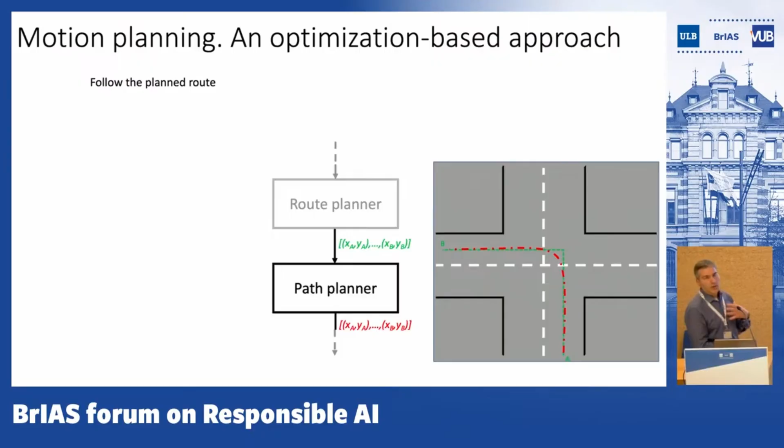So that's why in an autonomous driving stack, you have a module called the Path Planner. That does exactly the job we do every day while driving our vehicle. Okay, clearly we as a driver plan our path subject to a number of rules or constraints.

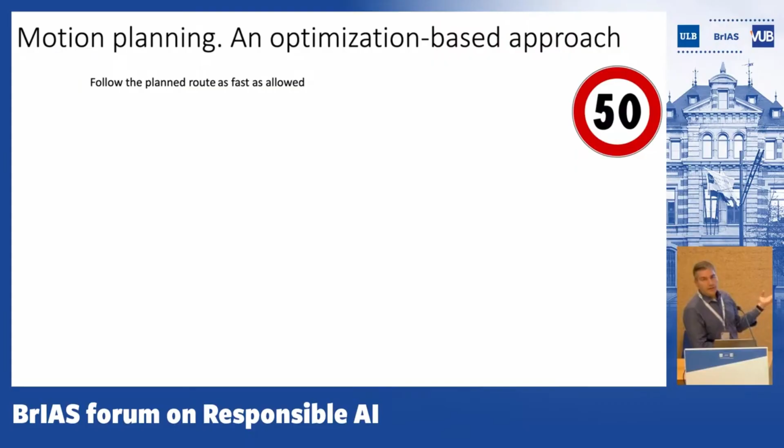So clearly we plan a path and we follow that path subject to vehicle speed, right? So speed limitation, like the one that you see over here. Clearly you don't plan anything which your car cannot do. So as a driver, we also plan our path subject to what the limitations of the vehicle are.

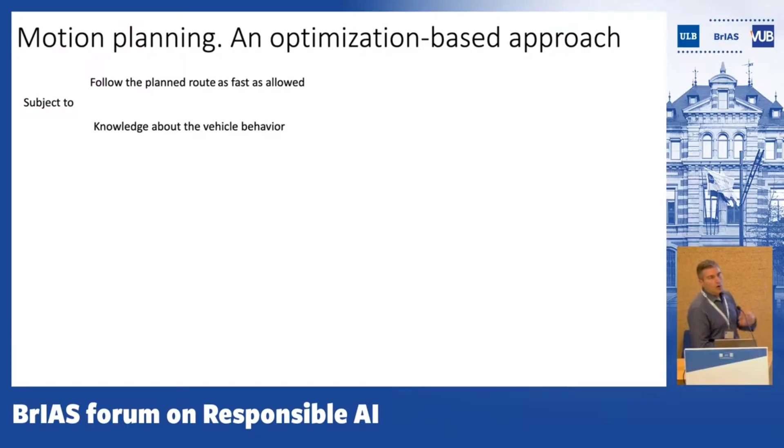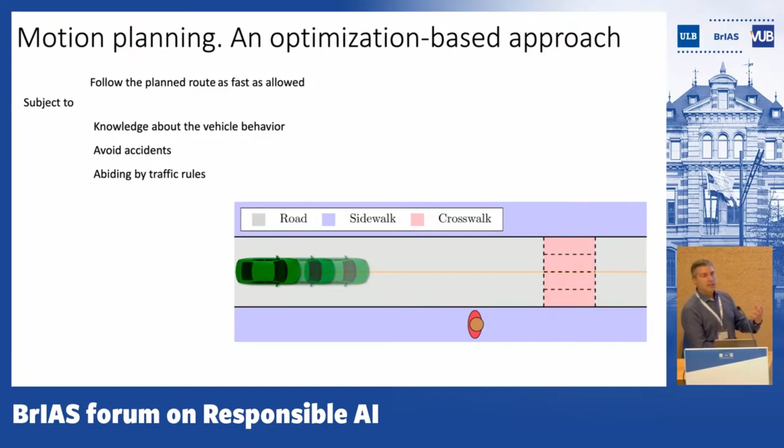Clearly, you want to avoid accidents. So if, while planning the path of your vehicle, you see a pedestrian or a static obstacle, well, you will make sure that you avoid any collision with any obstacles. Furthermore, you have limitations coming from the vehicle, right? So here we have a steering actuator.

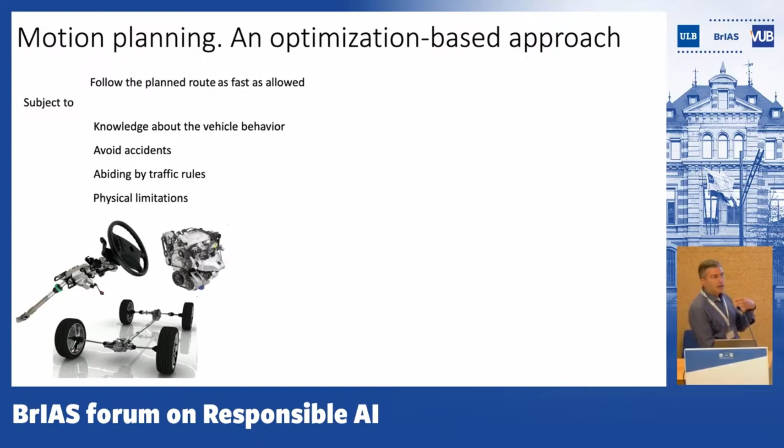Well, a steering actuator is basically essentially an electric motor, and you can't steer as fast as you want. So while planning your path, you should also account for limitations imposed by the physics of your vehicle. Same holds true for engine, braking, or whatever your actuators could be in the vehicles.

So to solve this problem, to solve the path planning problem as I just stated it, in our community we resort to a technique which is called model predictive control. So the path, the sequence of points which we plan to follow, are the results of an optimization problem. In this optimization problem, what we try to do is to optimize the future behavior of the vehicle with respect to a future sequence of control inputs, steering command, acceleration commands, braking commands, and so on.

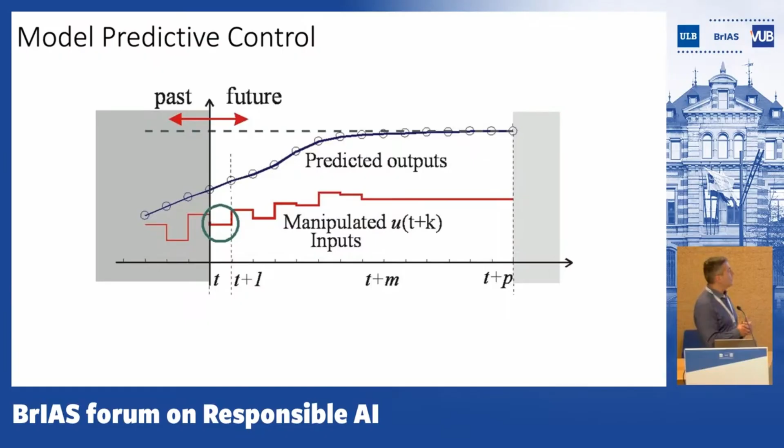So what we do is to have a plan, a trajectory from the current time up to a future time instance. We just use the first portion of this plan and we throw away the rest. We wait some time, collect new measurements about the environment, about the state of the vehicle, its velocity, its position, and then we redo the same job over and over again. So this technique is called receding horizon or model predictive control. It's two different terminologies for the same scheme.

So let's try to write in math what we have just said.

In our case, what we are going to do is try to minimize, at every time instant, a cost function. Such a cost could express the willingness of having a red line as close as possible to the green line, right? So, please find a path which follows the desired route such that I can go from origin to destination.

But then, as we said, our path must also be subject to the limitation of our vehicle, right? So we should account for whether our vehicle is a bicycle, a car, a motorcycle, or a truck. And then we should also constrain the generation of our path to the limitation of the vehicle: steering limitation, steering rate limitation, and so on.

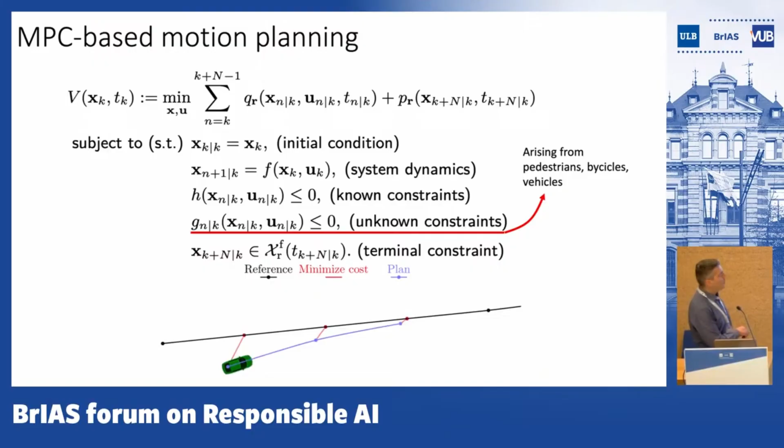So it looks like a scheme that perfectly fits the path planning problem that we have just stated. But there are several issues to be accounted for.

First of all, this is an optimization problem that we need to solve in real time. What does that mean? It means that every 50, 20 milliseconds, we need to pack such a problem, give it to a software solver, an optimization solver, and hopefully get the solution in time, before the 50 milliseconds.

But there are a few more issues. One is stability issues—how to make sure that the path we get nicely and smoothly approaches the planned route. We don't want something that is oscillating or eventually deviating indefinitely from the planned route. That's called stability issues.

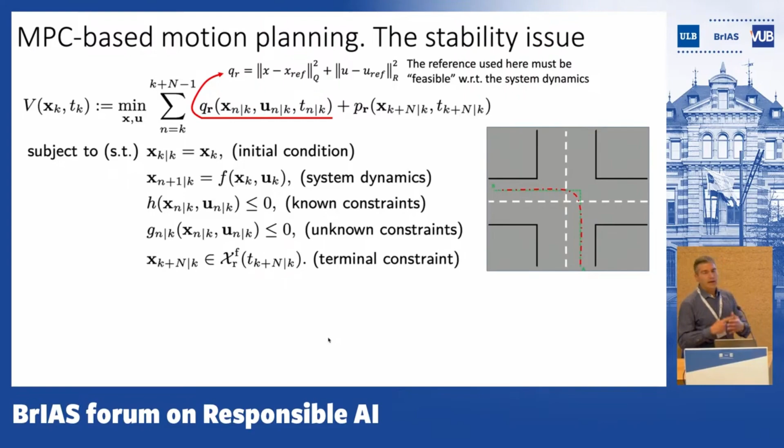And there are results which guarantee that you can eventually stabilize around the green line—results requiring that you generate this green line such that it satisfies the system dynamics. It's a strong requirement. That's why in the literature you find more recent results from us, but also a bit earlier, allowing you to feed this green line even when it doesn't satisfy these constraints, and still have a stability guarantee.

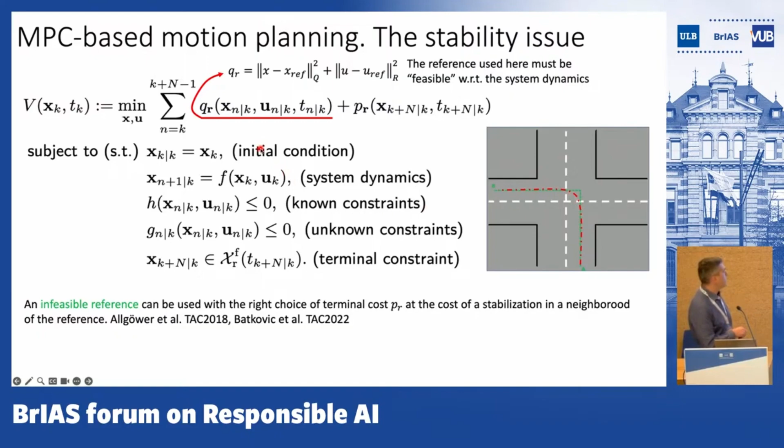But what we focus on mostly in our work is feasibility issues. What does that mean? Well, what we want to make sure of is that we never plan a path such that a crash, an accident, becomes unavoidable in the future. We want to make sure that we always plan a path such that we can still do something in case, for instance, vehicles pop up, pedestrians suddenly cross the road, and so on, to some extent at least.

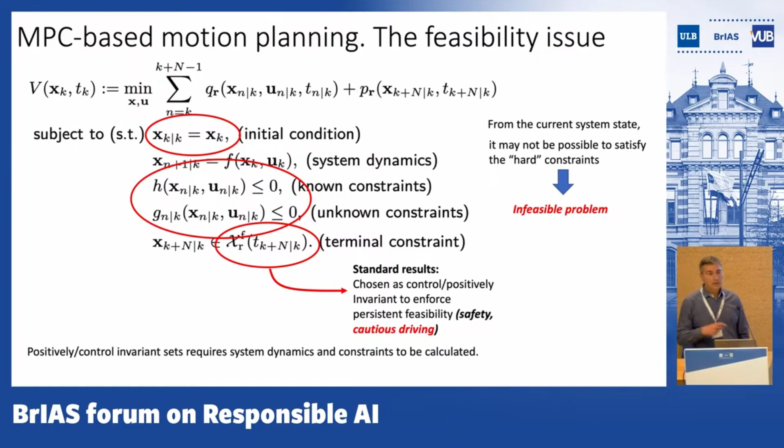There are results which allow you to make sure that this is the case, and in particular you can design such terminal constraints—constraining the state at the end of the horizon, the position of the vehicle, the velocity of the vehicle at the end of the horizon. For instance, if you are planning to approach a wall, you may impose that the velocity at this position is zero, so that you avoid smashing into the wall.

That's just an example. What's the problem with these standard results found in the literature? Well, to compute such a set, you need to know the system dynamics—this function f. No problem, most of the time you have it, and it's fairly accurate; it's a mathematical model of the vehicle.

You also need to know this set of constraints—no problem, most of the time you know what the braking and steering limitations are, to a fairly accurate extent. But what you don't know is this constraint. This constraint, once more, models collision avoidance against obstacles, and when you code your controller, well, they are not there. Nobody is going to tell you that in 50 meters you will have a pedestrian crossing the road.

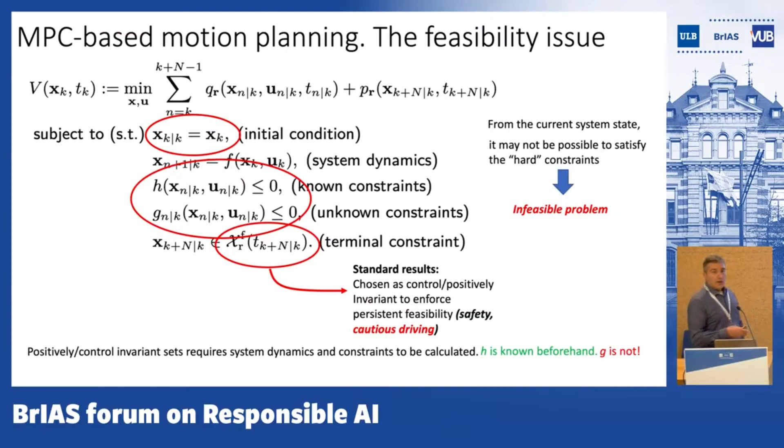So that's the problem with these standard results in control theory. That's what we have been contributing with. An example of how these unknown constraints, such as collision avoidance constraints, could be modeled is given now.

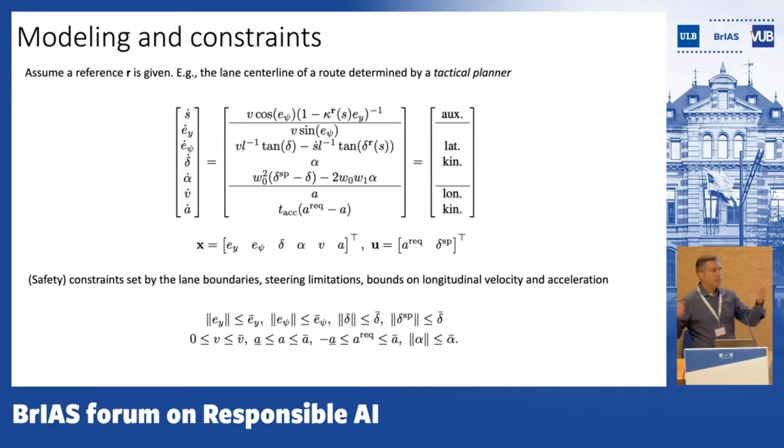So over here I have other constraints, for instance reflecting limitations from the steering actuators, the engine, and the braking capability, and so on. Let's talk about these collision avoidance constraints, how we can build such a mathematical function, such an inequality.

This over here is just an example—you can do it in many ways, this is only one of the different possible ways you can write this inequality. This could be a collision avoidance constraint saying, for instance, make sure that the minimum distance—here written as a maximization, but it could be the minimum distance—from a pedestrian is larger than something.

So this means don't get closer to an obstacle than, say, 3 meters, or whatever the value is.

This function is clearly a function of the vehicle state and input, so it's a function of the vehicle position and velocity, but it's also a function of some additional variable that describes where the obstacle is. This W, for instance, could be the relative position of the pedestrian or the other car with respect to the vehicle. And clearly it's uncertain—it's difficult to model what a human will do, whether it's a driver or a pedestrian.

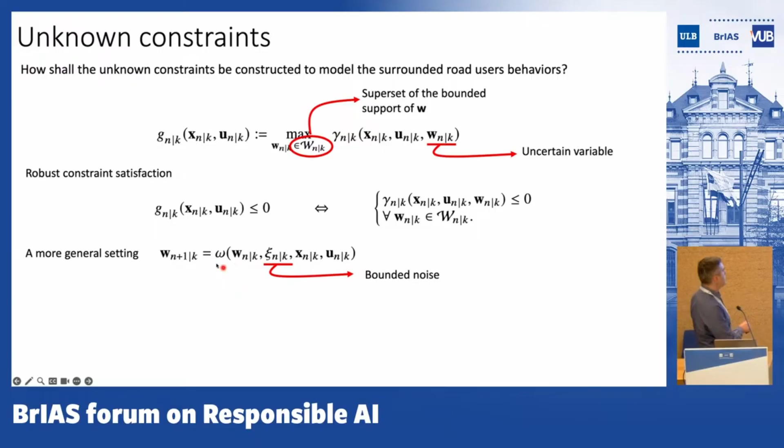So the approach we have followed is to model the motion of the obstacle we want to avoid as a dynamical system driven by bounded noise. In the most general setting, you may also want to model the interaction of the pedestrian with the vehicle, which is why over here we also have the vehicle states and control inputs.

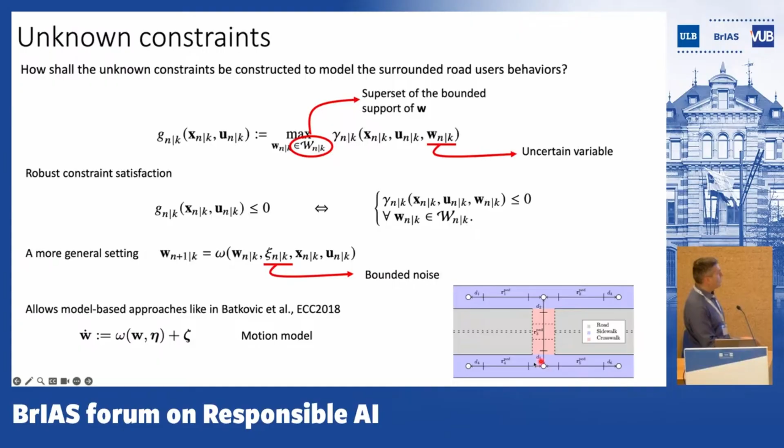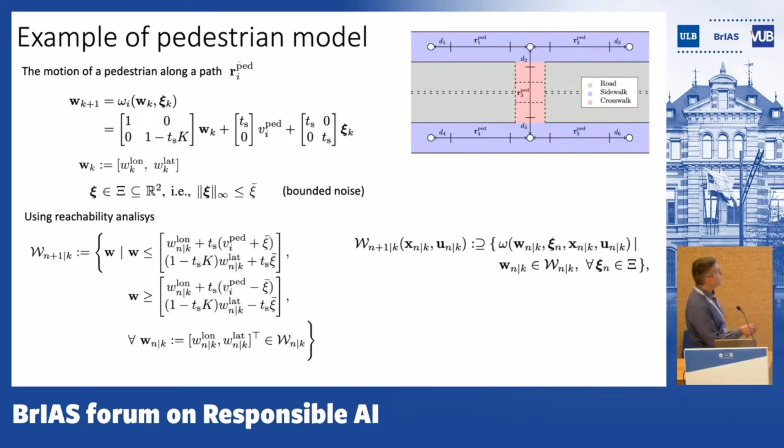An example we used in one of our publications is to model the pedestrian as an agent that follows a line on a sidewalk or along a crosswalk. In this case, just to speed up—which is just a technicality—what happens is that we can describe a set of the pedestrian's positions at the next time instant, two time instants, three time instants, over the whole prediction horizon. So basically, in our optimization-based motion planning, we get a set of pedestrian obstacle positions where we are not supposed to be over the prediction horizon.

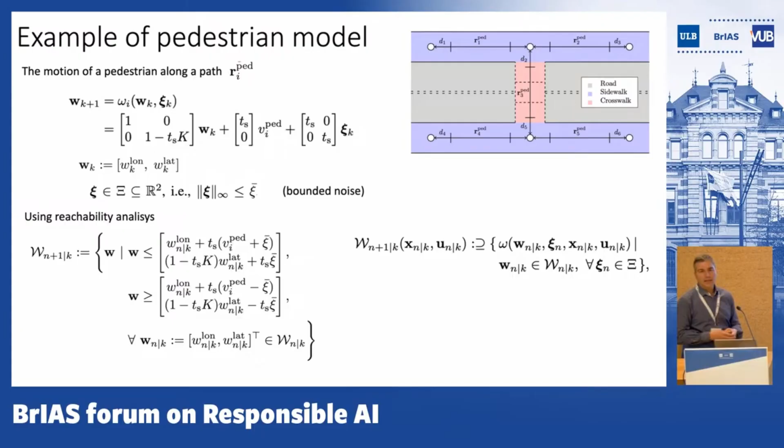That's the way you plan your path. So to make everything work, we need some assumptions, as usual. The first assumption we use is that there exists a safe set.

Let's make an example. You are in the city center—a safe set could be, for instance, pulling the car over on the right. Clearly such a set wouldn't work in the middle of an intersection—if you suddenly stop in the middle of an intersection, most likely you're going to end up in an accident. On a highway, it could be the same.

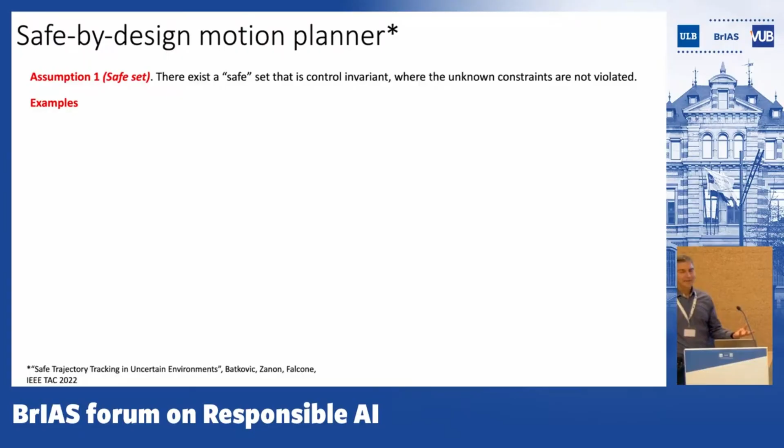So we assume that such a set exists. Clearly that may not be the case, and in those cases, this approach doesn't work.

There is a second assumption, which might be a little bit strong, but makes a lot of sense in practice. This is called the consistency assumption. What does it mean? Let's make an example.

Consistent prediction is such that the uncertainty at time k plus 1 is less than the uncertainty at time k. And that makes sense, right? So I'm predicting how the weather is going to be tomorrow. The closer I get to tomorrow, the less my uncertainty is.

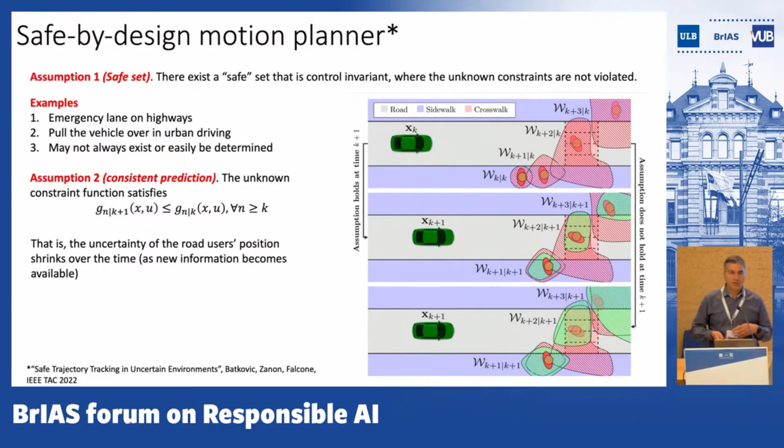Let's see how all this works. This is some simulation. We are simulating a vehicle negotiating this intersection with a pedestrian. So here we have a pedestrian, we have a crosswalk, and here we have our vehicle. We formulate our motion planning problem as described before.

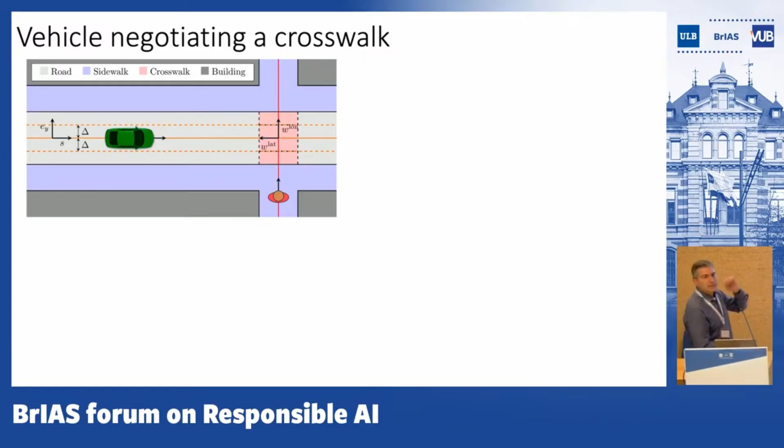So what happened is that, well, here there are no constraints, right? So we can go freely. But then suddenly a pedestrian appears here, and we have this surprise, right? So suddenly we are not allowed to get into that set anymore. Well, that's basically a case where the consistency assumption is broken.

But then the results we just gave say that if our predictions are consistent, then we can avoid the accident. How can we make our prediction consistent? We have seen that just because of the limited sensor field of view, our predictions are not consistent.

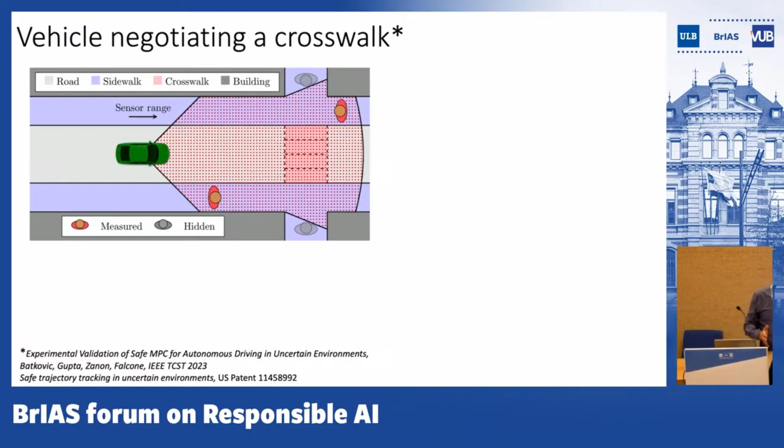So what we do here is to drop a ghost pedestrian, and all the time we assume that this ghost pedestrian is going to cross. Clearly, that may never happen, and we might be overly conservative, but that's what we do. If we see a parked bus and then a crosswalk, we are a little bit more cautious, right? We slow down.

Why? Because someone may start crossing, but that's a kind of natural behavior. Let's see how it works. Over here, you see that we have a kind of ghost pedestrian, but we are slowing down because we propagate this set. In this set, we are not allowed to be.

This might not be the case at all, never. So the pedestrian may not show up over there, but actually, suddenly a pedestrian shows up. This is the predicted position. And you see here, consistency applies, consistency holds. So in this case, we have all the time to slow down and brake in time to avoid a collision.

So again, we are introducing a little bit of cautiousness in our planner to make sure that we can handle unexpected situations.

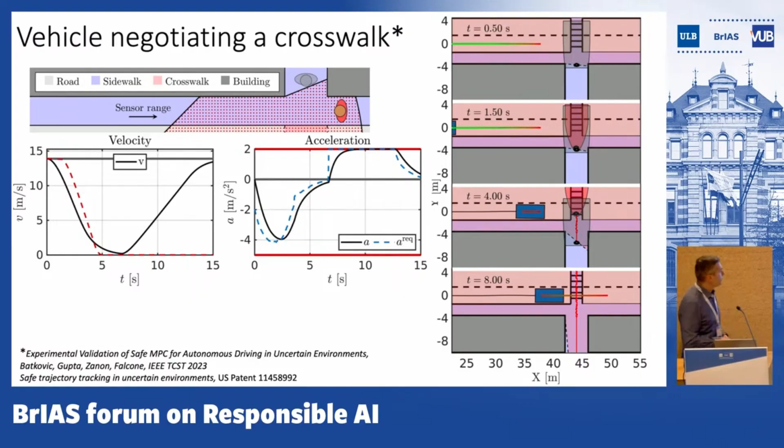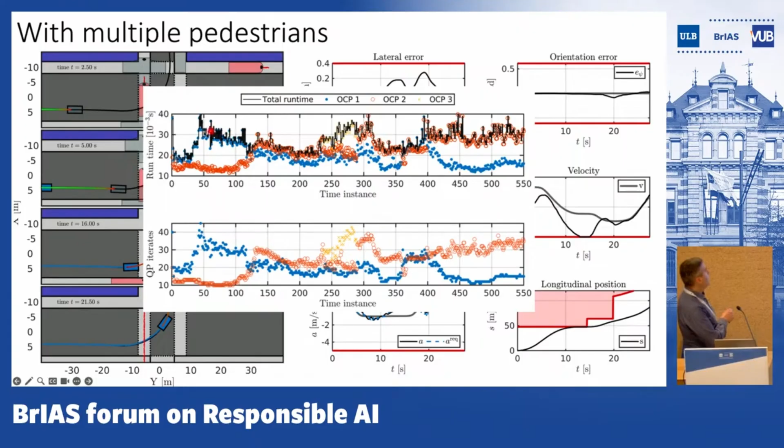So here's an important piece of information: how expensive is our approach in terms of computational complexity? Well, this plot shows that the maximum time it takes to solve our optimization problem was 40 milliseconds, well below, slightly below actually, the 50 milliseconds which is typical for this type of application.

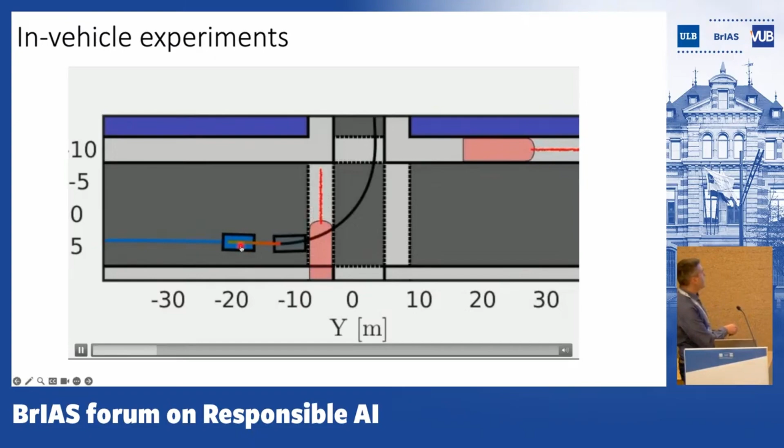So this is a replay of experimental data. Now you see basically the animation corresponding to the previous simulation results. This is the prediction of the vehicle, and this is the actual vehicle. We plan that we should stop over here.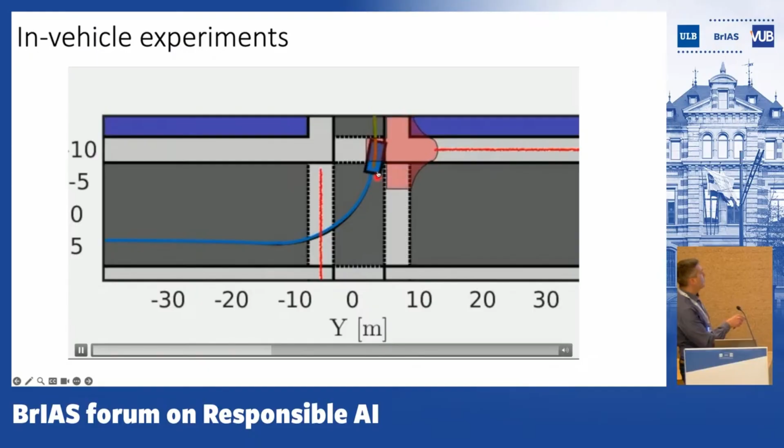The pedestrian has crossed, and then here we understand that actually we can do the job even by left turning before the pedestrians come. And we do.

This is Ivo. Now he's working at Zenseact and is basically performing this test. Here we used a simulated pedestrian — we didn't have the permission to do tests with human pedestrians, as you can imagine.

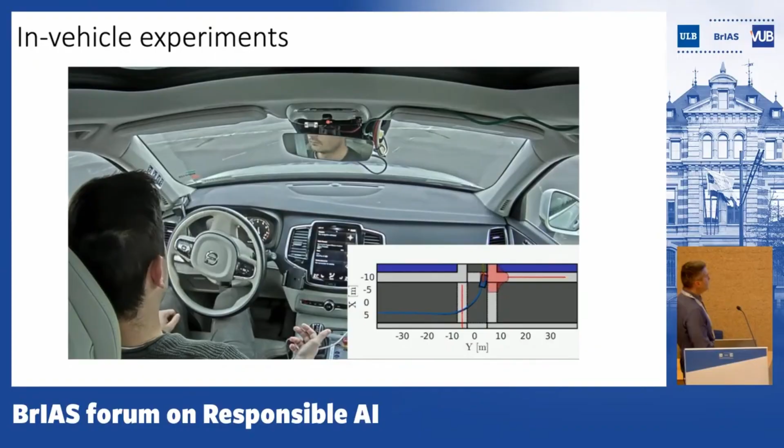Okay, we have improved this approach, because, as I said, the consistency requirement could be a little bit strict, a little bit stringent, overly conservative. Yin Shuai is a postdoc at Chalmers, working in a project together with Ericsson, where we are trying to collect information from cells, communication cells, to learn and then predict the behavior of humans in traffic.

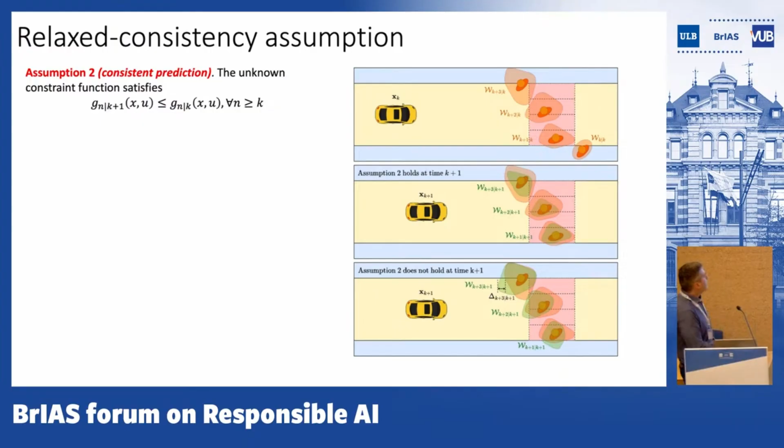And what she has done here is to assume that for some reason the consistency assumption is broken. So what does it mean? It means that the inequality I showed you before also has some positive term over here. Recall that this should be negative, minus g is a positive quantity, so this is a positive quantity over here.

So it can be shown that even in the presence of bounded inconsistency assumption, what you can do is solve an extra step optimization, an additional optimization problem that basically tells you how much you should relax some constraints, for instance on steering rate, braking rate, in order to cope with such inconsistency in the prediction.

So the idea is the following: if possible, we try to drive smoothly and gently and nicely. But if something happens, we are allowed to brake more than would be necessary for smooth and nice driving. For those of you interested in the technicalities, I can share some papers.

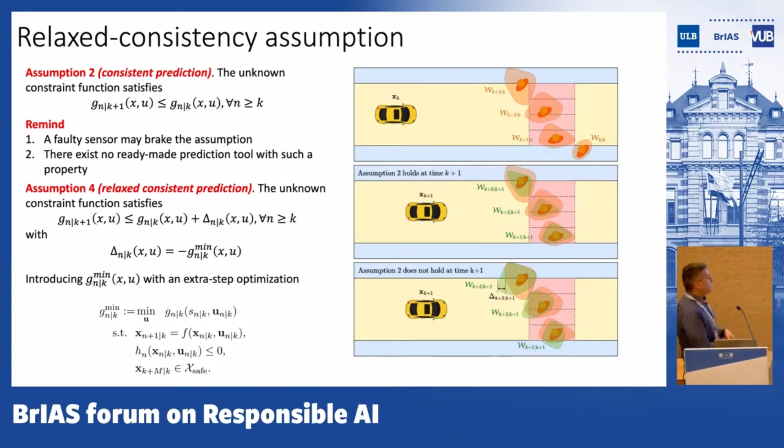But over here now, I want to show you some results based on real data that we got by using what we call the uncertainty-aware MPC-based motion planning.

So what you are going to see here is a vehicle that is driving on a highway. It's real data collected on the ring around Gothenburg. And at some point, while traveling on our lane, there is a vehicle that is cutting basically our path to take an off-ramp.

Okay, so what is going to happen is that the vehicle is driving in a comfort mode — very limited braking, very limited steering, very limited jerk, lateral and longitudinal jerk, to plan a very smooth path.

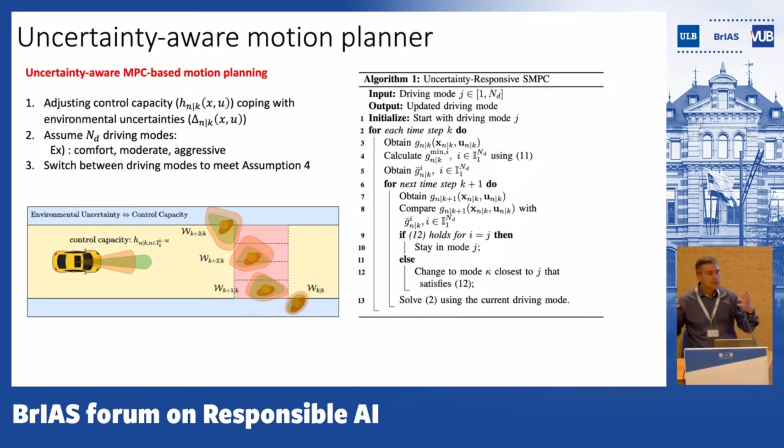But then at some point we see that this guy, the one cutting our path, is behaving in an inconsistent way. And then the question is: how much harder should I brake or steer to avoid collision with this inconsistent guy? That's what you're going to see.

So here is the data that is publicly available from this ZOD, the Zenseact Open Dataset. It's very much similar to, for those of you familiar with, Waymax, the dataset released by Waymo, and nuPlan, the dataset released by... it will come to me.

So what you see over here is that this vehicle is suddenly, yeah, that's what it's doing. Okay? So normally, with the controller that we are using, we couldn't cope with such a cut and keep a safe distance — we recognize that we cannot. Then what we do is switch to a controller with different bounds such that collision with this vehicle is guaranteed not to happen.

So those are the results that you see over here. You see that the vehicle is braking as much as it's allowed to brake, which I think is 3 meters per second squared.

This plot shows the inconsistency of our prediction. At some point, we detect that this vehicle overtaking on the left is moving suddenly to the right, cutting our path. We recognize that our controller cannot do the job anymore, so we switch to a different controller which is allowed to brake more, avoiding the collision with this vehicle.

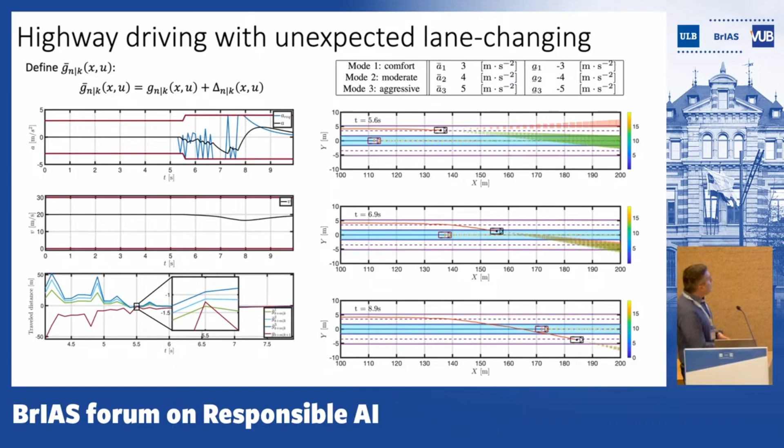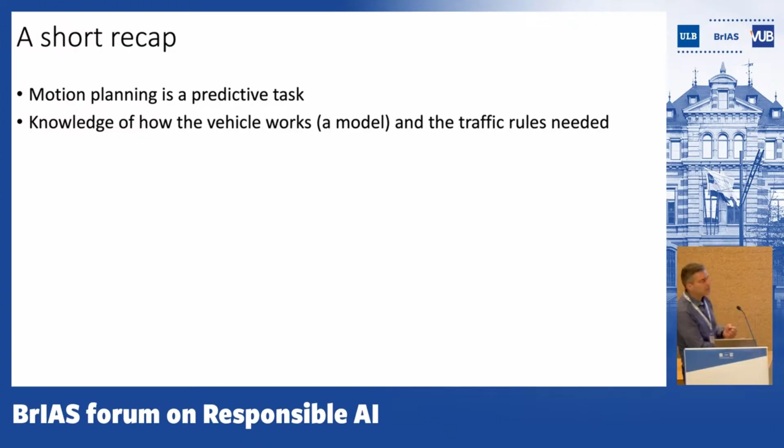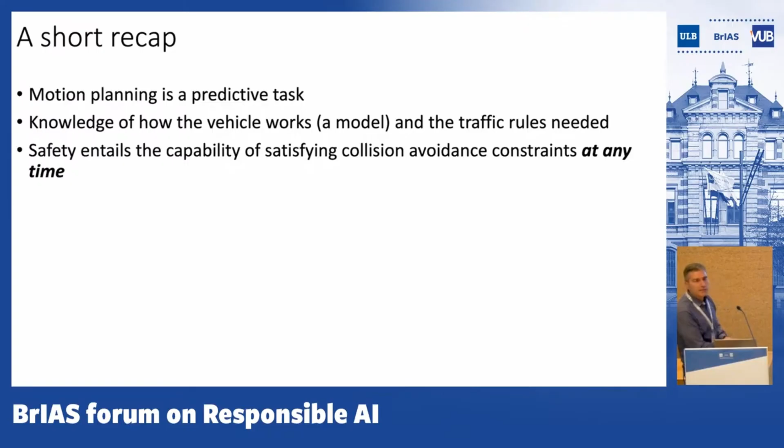So far we have been talking about motion planning mostly in urban environments, and you've seen that prediction of the behavior of surrounding road users plays a central role. You also have to modify how you solve your motion planning problem to cope with the uncertainty connected to that prediction.

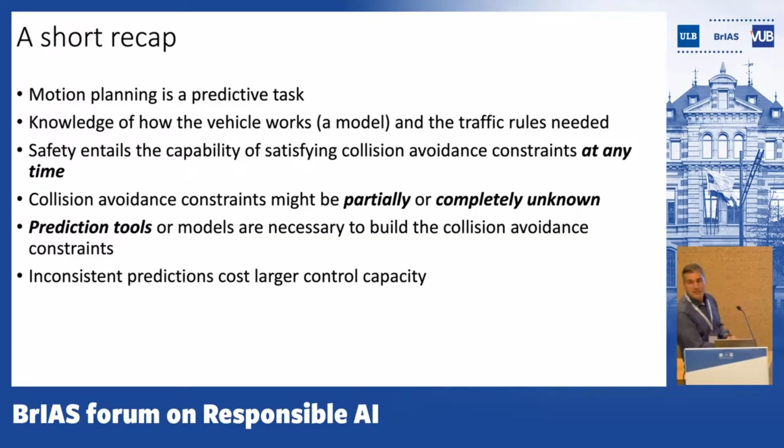At some point, what I was planning was to talk about how to make predictions of surrounding road users, but I will skip this part. Yesterday I got some slides from my student, who has been part of the Unimore Racing autonomous racing team. There are 2 competitions: one is the Indy Autonomous Challenge, done in the US, and another called A2RL, done in Abu Dhabi. This student has been in charge of designing the motion planning for autonomous racing, and yesterday he sent me some nice results. I thought it would be more interesting and exciting to talk about these results, so for those interested, I can share the slides and papers, but let's jump to this instead.

So that's what we are going to talk about. The PhD student I mentioned is Francesco Prignoli. He's visiting Francesco Borrelli at UC Berkeley, my former PhD supervisor, and he got help from some local PhD students, so it's a joint work.

What we've been focusing on is this: in racing applications, when it comes to overtaking, you have right-of-way rules which are extremely important. If the defender does not respect this right-of-way rule, he gets penalties. It's the same in Formula 1. If you don't give enough lateral space to the attacker when they're close enough to the defender, you get a penalty, which can be a long lap penalty, meaning you have to take a longer path or go through the pit lane. It's a punishment, because you've broken a rule.

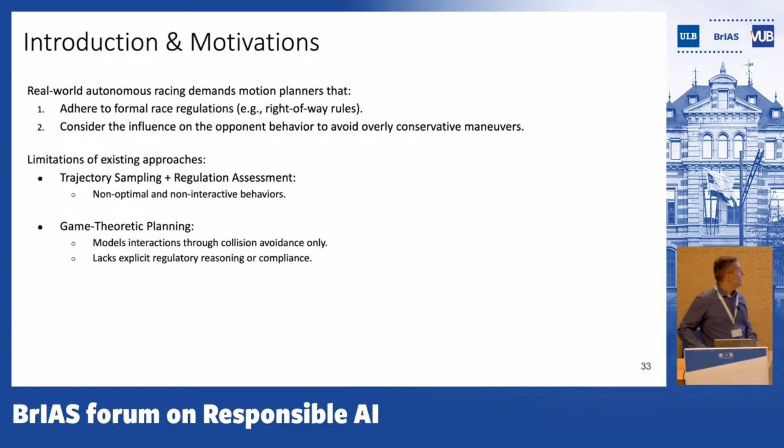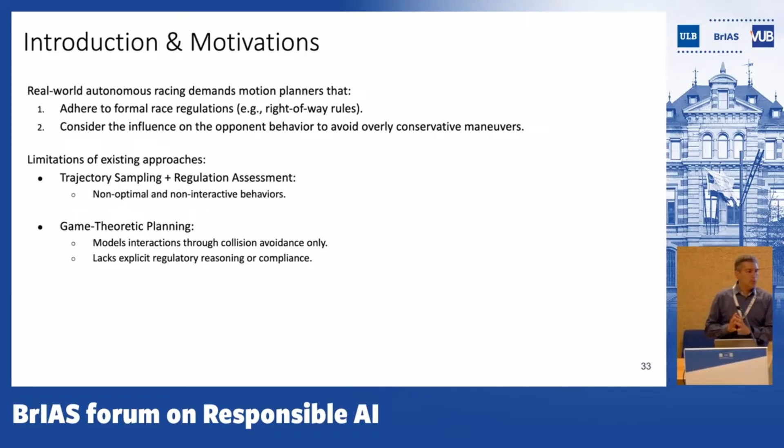So what we've done instead is code a set of inequalities into the motion planner of the defender, representing the right-of-way rules. This basically says that when the distance... the blue is the defender, the car to be overtaken, and the orange is the attacker, the car that is overtaking.

The rule is that when delta row s, the longitudinal distance, is below a certain threshold, then the blue car should not decrease delta row g, that is the lateral space. From that point ahead, the lateral space left for the attacker should be larger or equal than delta row g. That's the rule, one way of mathematically modeling it.

So what we've done is to model the defender as a vehicle planning its path with a model predictive controller, exactly as shown before, but we have coded the right-of-way rule. So we model the fact that the blue car is respecting the right-of-way rule.

The orange car is planning the path consequently in a game theoretical scheme. It's a non-symmetric game because the only thing the blue car does is try to satisfy the right-of-way rule, while collision avoidance is only in charge of the orange car. So it's an asymmetric game.

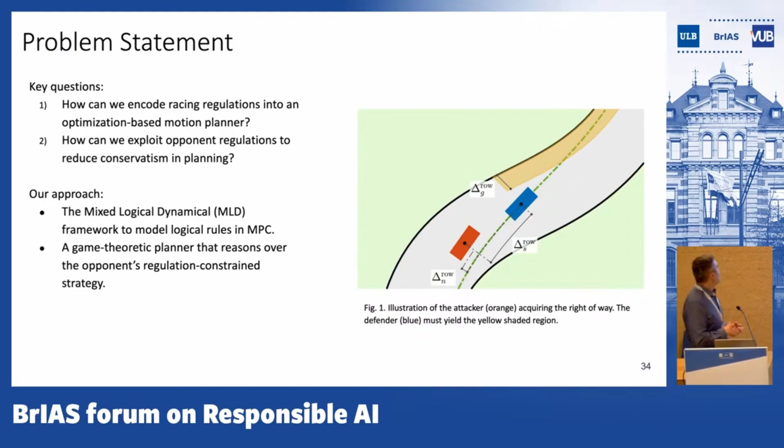So each car basically solves a very similar problem to what we saw at the beginning of the presentation. These two constraints are different for the orange and the blue car: for the orange car it's a collision avoidance constraint, while for the blue car it's right-of-way rules, a set of constraints which impose the planned path of the defender to satisfy the right-of-way rules.

The right-of-way rules can be written as a number of inequalities made of continuous and integer variables. That's why the problem you solve here is a computationally nasty optimization problem, a nonlinear optimization problem with integer variables.

Our goal at this stage is not to solve this problem in real time, but rather to answer the question: is really including the right-of-way rules paying off or not? Let's find it out.

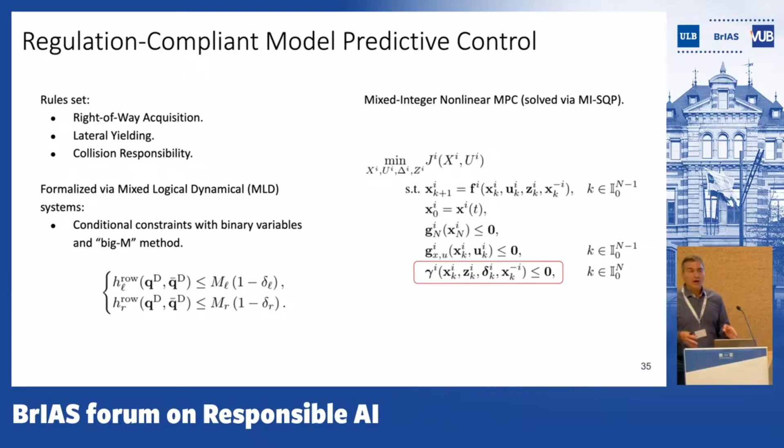So far we just have simulations, no on-field experiments yet, so what you are going to see are only simulations. Here is some simulation results, showing how the generalized Nash equilibrium of this game theoretical problem is going to look like.

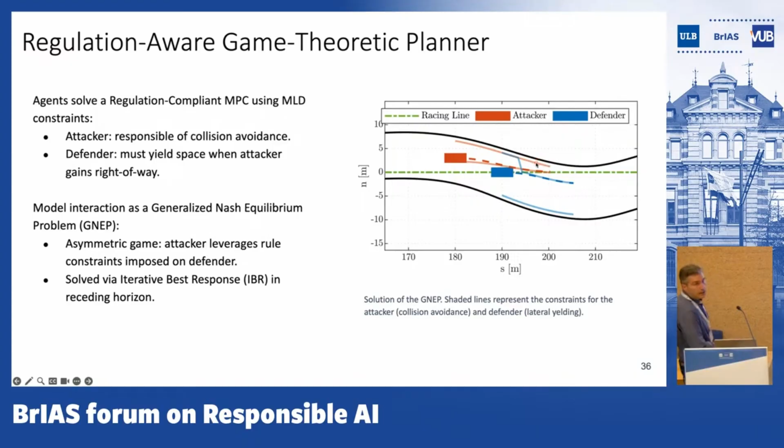So what happened is that, once more, this is the defender, this is the attacker. Here we have the attacker close enough, so this means that this guy over here, following this racing line in green, should leave at least this distance from the left lane boundary.

That's basically the right-of-way rule as we introduced before. So here is the baseline controller. In this pale blue, what we predict is that the defender will just keep following the racing line, because that's the most convenient thing to do—if you want to be fast, you just follow the racing line, which by definition is the minimum lap time racing line. So the attacker tries to see if there exists any trajectory such that he can overtake the defender.

That's not the case—if the defender goes on the racing line, there is no way to overtake it. Aborted. So that's what happened instead using our approach: you see that the blue vehicle is following the racing line, but at some point it will see that the attacker has approached and the right-of-way rule must be satisfied.

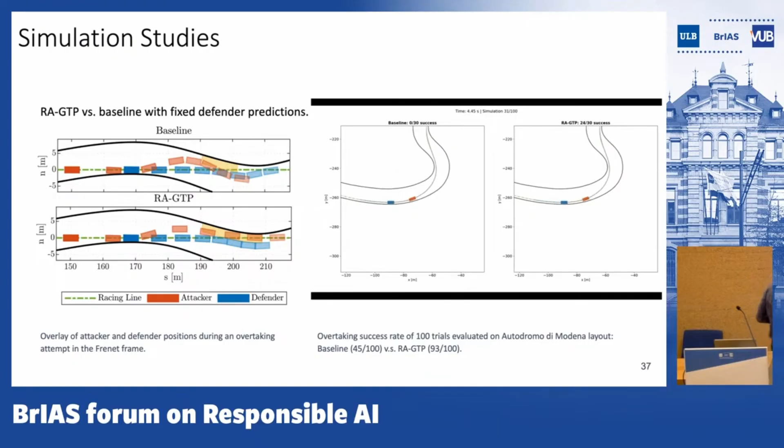It will go over and over again, and the outcome is that we succeeded in 93 out of 100 trials, while the baseline only makes 45 successful overtakings out of 100 possibilities, 100 corners.

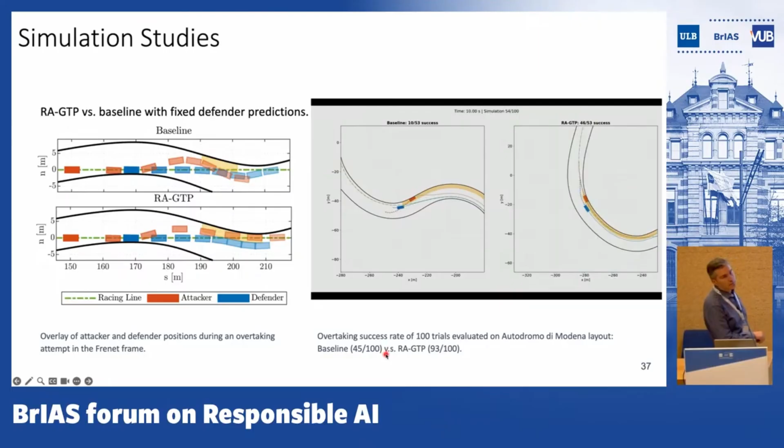Okay. So I would close here my presentation.

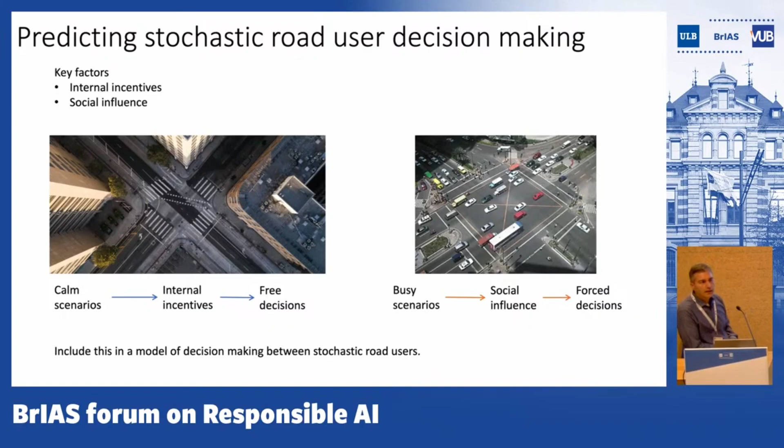In this type of tool, you model a single individual in a traffic scene as a Markov chain. And what you can do then is form a network of Markov chains to also model the interaction between these Markov agents. Is that convenient? Well, yes, from one point of view.

Why? Because if you describe with these pis the probabilities that an agent will make one decision rather than another, the evolution of these probabilities is described by a nice system of linear differential equations. You have elements on the main diagonal that describe what is called isolated behaviors. So if I'm a pedestrian freely walking at night in a city, with no car or other pedestrian around, what's the probability that I keep walking on the sidewalk rather than crossing the road? Well, it's basically just a statistical measure—I can count the number of times a pedestrian crosses or keeps walking on the sidewalk.

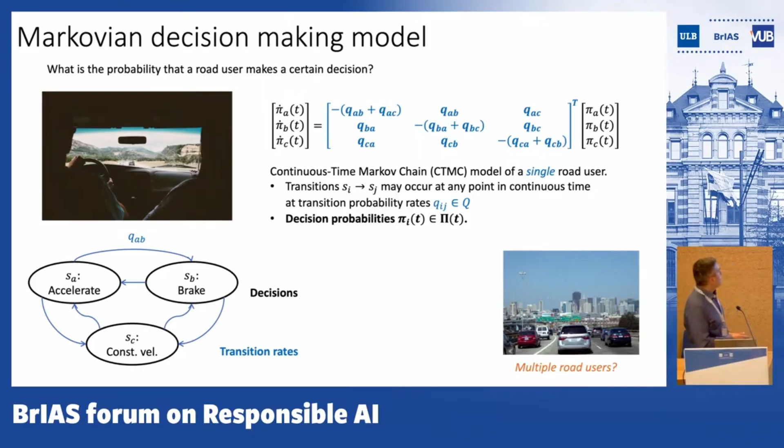So what we are doing now is trying to calibrate these matrices. This is the linear dynamical model that describes the behavior of this network of Markovian agents. One of these matrices describes what is called the isolated behavior, and the other two matrices define the interactions, so attractive and repulsive force.

In principle, there are no tools out there to identify and calibrate those matrices from experimental data, but that's actually what we are working on. So we are using some data from simulators to calibrate these matrices and be able to use these model structures in our optimization-based motion planning algorithms, which we have seen before. So that's what we are doing on the prediction of road users' behavior.

I will stop here. I also have some additional slides on this topic in case some of you are interested, but I'll stop here to be more concise. Thank you.

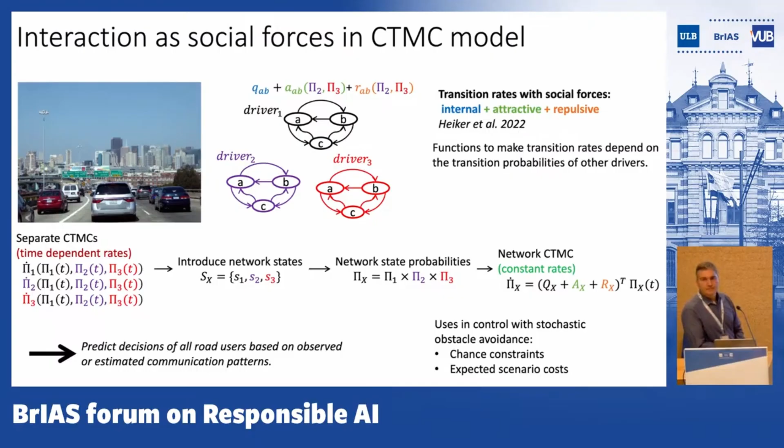Okay, so thank you, Paolo, for your presentation. I imagine we have time for a few questions, so we start from the back. I can shout out if you hear me. No, but they will not hear you online.

Thanks, Paolo, for the nice talk. Every time I come to BrIAS, I remember why I chose biology. I know that some of you will find this funny. I have two small questions, one stupid and one less stupid. You choose which one it is. Let's go for the stupid one. No, you choose. I'll give you the question.

So first, you always indicate the object in front of you, or like in the case of overtaking, a car that should leave you space. But what about considering the object behind the car? That's not stupid at all, believe me. Wait for the second question. Okay, but then it's scary. You choose, this was the stupid one.

Yeah, the other one is more on the biology side. Has the community ever considered social behavior and cultural behavior across different parts of the world? My mother always told me, if you're crossing the street, go back if there's a car approaching. My father said no, keep running. I don't know if that's Italian or European, or if you're testing this in Sweden. The Swedish might be educated to keep walking straight, or maybe in Asia or South America they'd rather jump, I don't know.